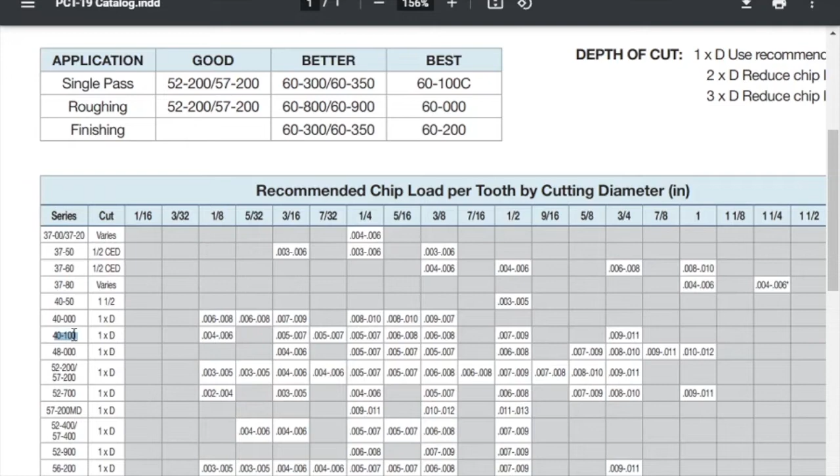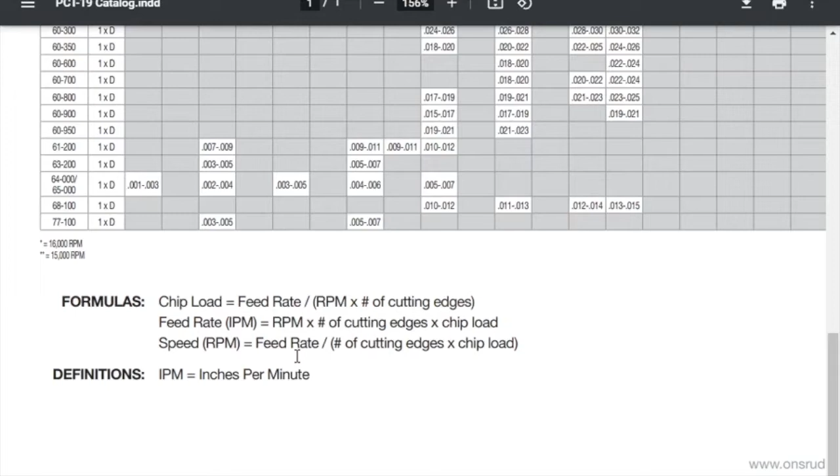And we have the 40-100 series bit, and it's going to tell us this is the recommended chip load that we should be using. Something to note here, they do give you the chip load feed rate calculations here at the bottom, but we're going to use Fusion 360 to help us calculate that out. So based on these chip loads, we're going to basically determine what our machine is going to be using, and since the chip load is given, Fusion 360 will tell us what our feed rates are at the end.

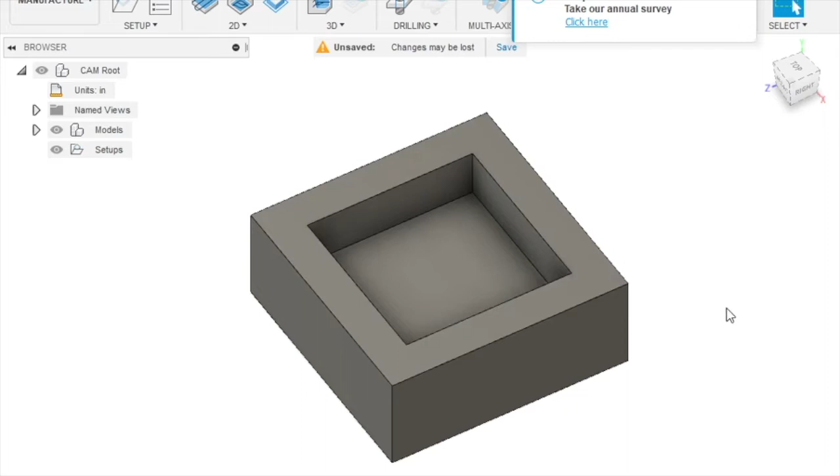So let's go back into Fusion 360 here, and this is the part that I want to do. So if you remember from the previous one, we have to first set up our material, and once we're in the setup, we'll go here into the stock material, and in this case I just want to mill out this pocket. So you can see how it's kind of overlapped the box. We're going to change that real quick. We're going to say from solid, we're going to click on our solid,

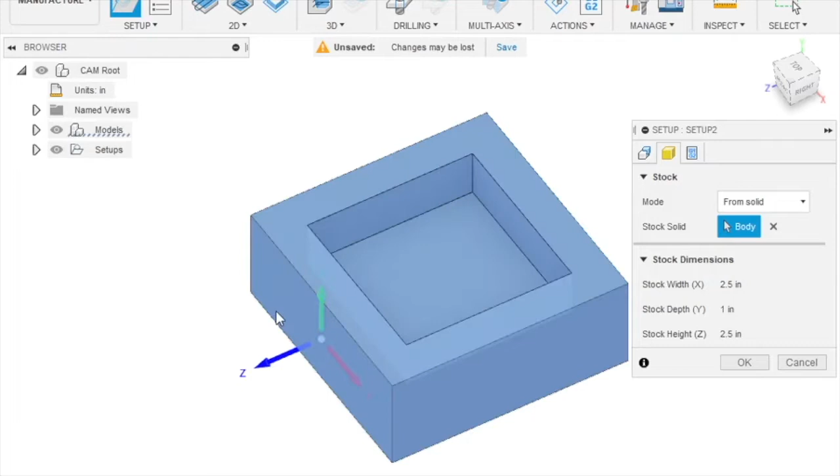and now our cutting box is the actual solid itself. We're going to go back to setup, and we're going to pick a machine point. Normally what I like to do is pick the top corner because that's where I'm going to zero my machine out. And then as for orientation, just make note if you do need to change that. So as of right now, my Y and X and Z are in the wrong coordinate system. So we're going to go back here and we're going to try to flip the orientation.

So we're going to pick the X and Y axis because that makes life easy. So this is my X axis, this is my Y, and my Z is now in the opposite direction. I'll just click on Z, and it was supposed to just flip it as easy as that was, but that did not work. So there we go.

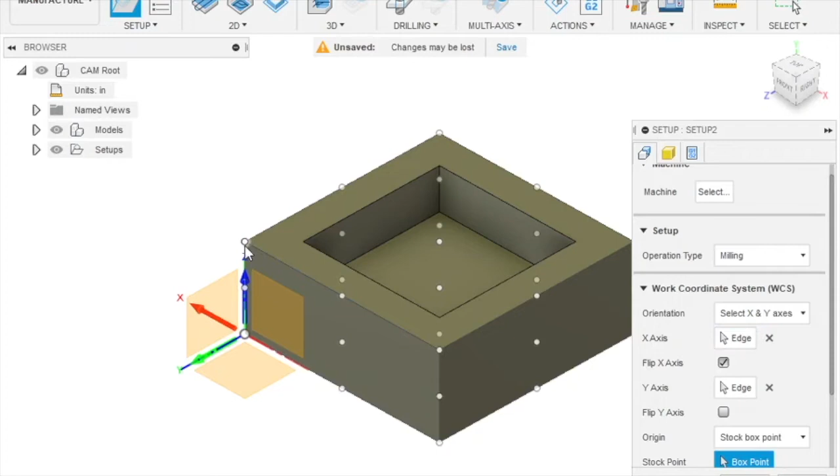X, Y, and Z. I'm going to end up picking my stock point as the top again. And there, I just want the Z going in the up direction. My X and Y, obviously you can flip and rotate and play with that as need be. I'm going to go ahead and hit OK.

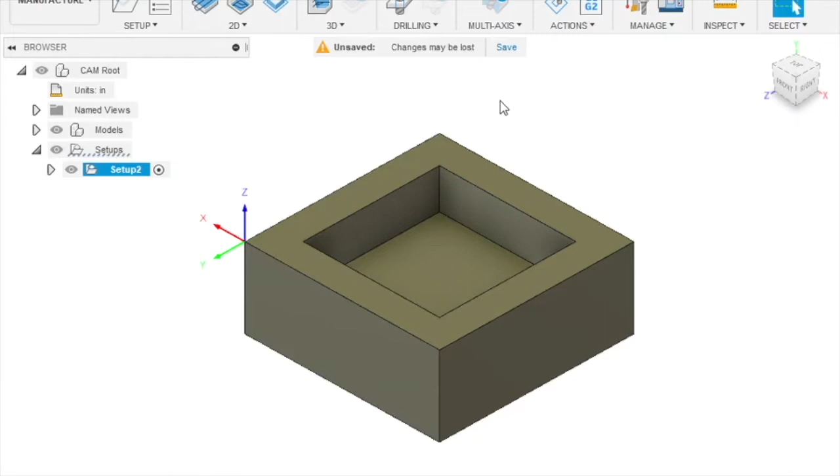And there we go. So now you're saying, okay, well, how do I input my tool that I want to use? So in this case, we're using that Onsrud 1/8 inch bit. And that's where we have to then go into our tool library. So what we're going to do is go into Manage, Tool Library, open that up.

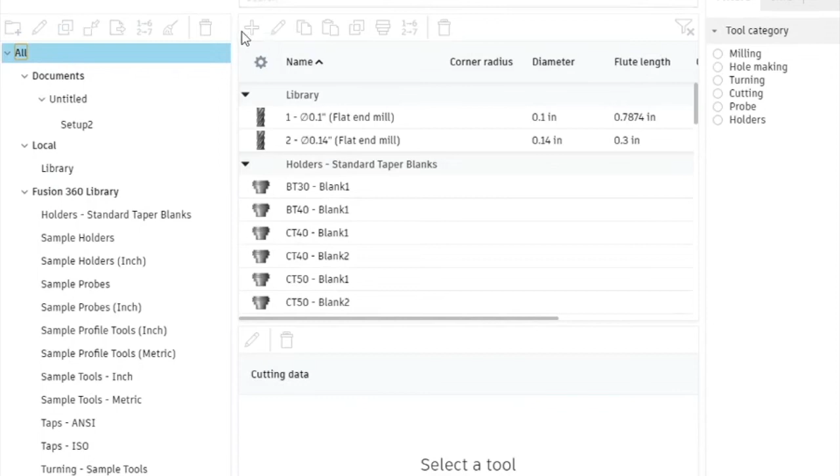Inside of here, you'll see a little plus sign at the top. We're going to have to click into one of these. So I'm just going to go ahead and click Library, for example. And you'll see the blue plus sign has been added. If you're in the All category, you'll see it's grayed out. That just means you need to drop into one of the subcategories in order to add it. So we're going to go all the way into our library and click the plus sign.

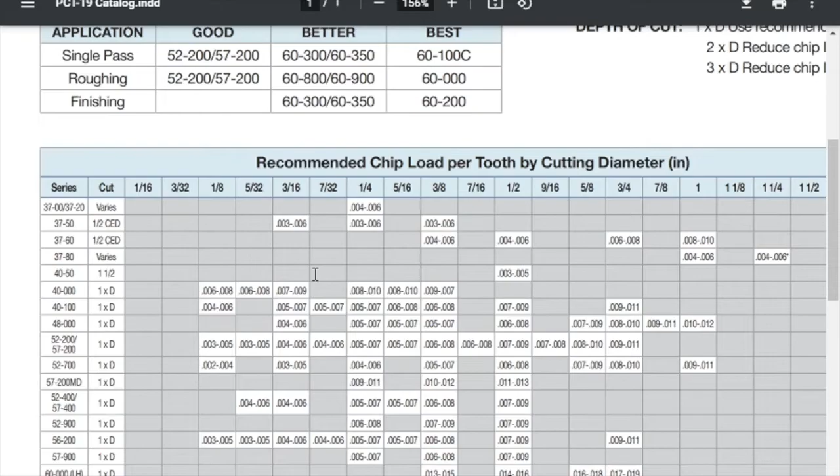So this bit for this purpose is a flat end mill, 1/8 inch diameter. Length of cutter is 3/8 of an inch. The shank diameter, which is past the cutter, is 1/4 inch. Our overall length is 2 5/8 inches.

And a lot of times people don't realize it, but you want the helix direction normally when you're milling items to come up, because what that does is it pulls the chips away from your material. There are some instances where you want to use the helix direction going down, but for a home hobbyist, just make sure that you pick the up direction.

In this case, it'll have 2 flutes. If you can afford to get a higher number of flutes, it is recommended, because then with your chip load, you can spin the RPM faster. So obviously less flutes, less RPMs, and you'll see that in the demonstration here, hopefully. So here we go. We have a flat end mill, and we'll go ahead and pick that.

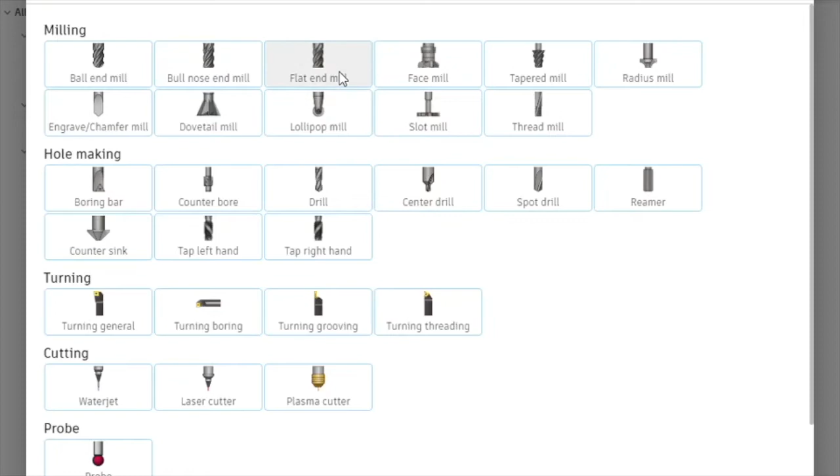And we'll just call this Onsrud 40101, which I believe was the tool name. So let's just double check. 40101. And for this case, we're actually going to call it hardwood.

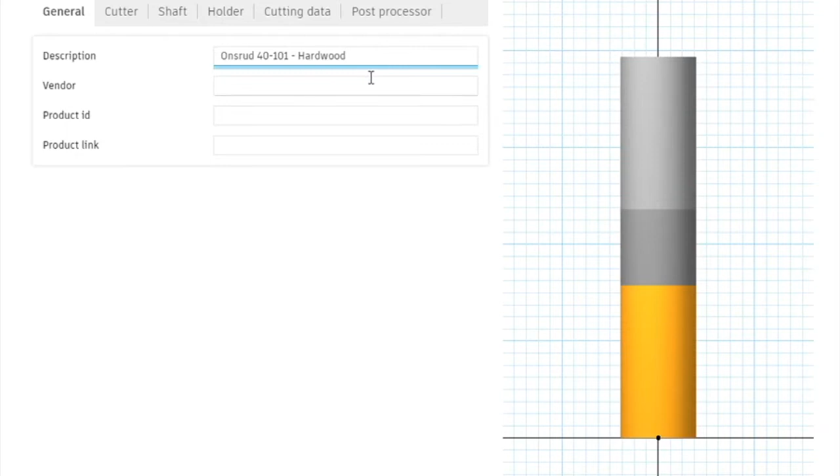The reason why we want to at least call it hardwood is because there's different chip loads for different types of materials with their data sheets. So a lot of vendors have these data sheets. It's just a matter of finding them. And especially a reputable manufacturer of end mills, they'll have that information for you.

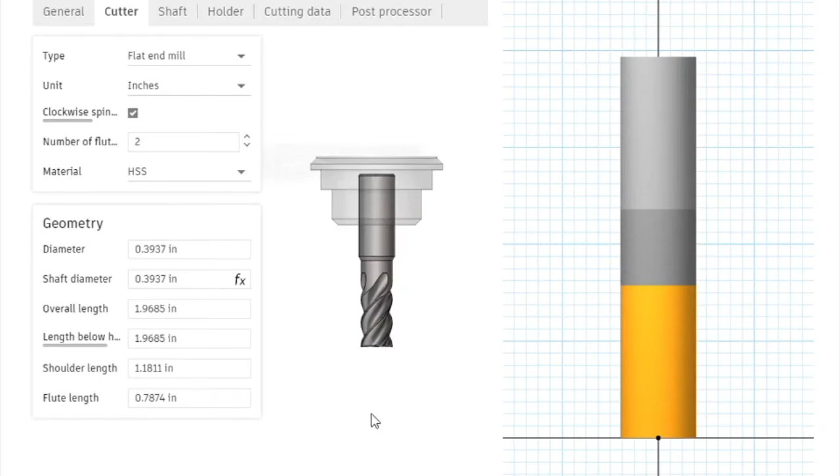So we'll go here to cutter, make sure the flat end mill, number of flutes we said was 2. This is going to be a high-speed steel, if I'm not mistaken. Yeah, high-speed steel HSS. And it's going to be 2 flutes upcut. So my diameter in this case is the cutting diameter. So we're going to say 1/8 of an inch.

Our shaft diameter. So when you're clicking here to the left, you'll see the blue arrows here on the right. So diameter is asking about the cutter. The shaft diameter in this case is different. It's 1/4 shank diameter. So we'll show you that's going to be 1/4. And over here is what it's kind of drawing out the tool.

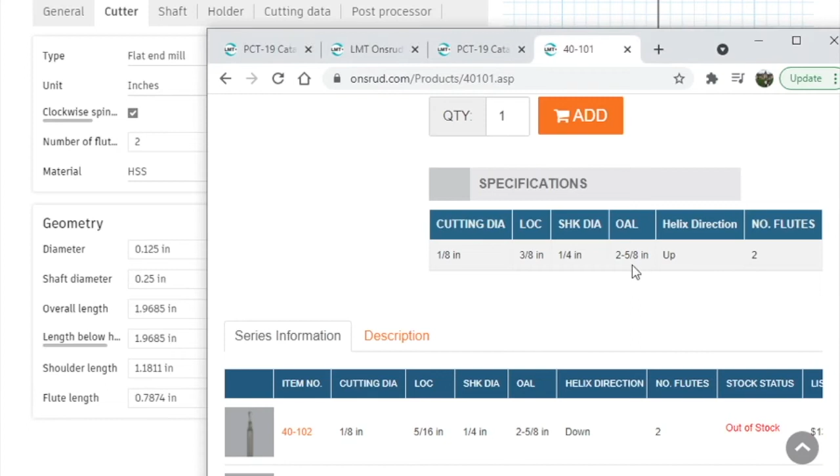Our overall length was the 2 5/8. So we'll go to overall length, say 2 5/8. And then length below the holder, we'll just assume we probably have that chucked up pretty good in there. So let's just say 0.75. Whoops.

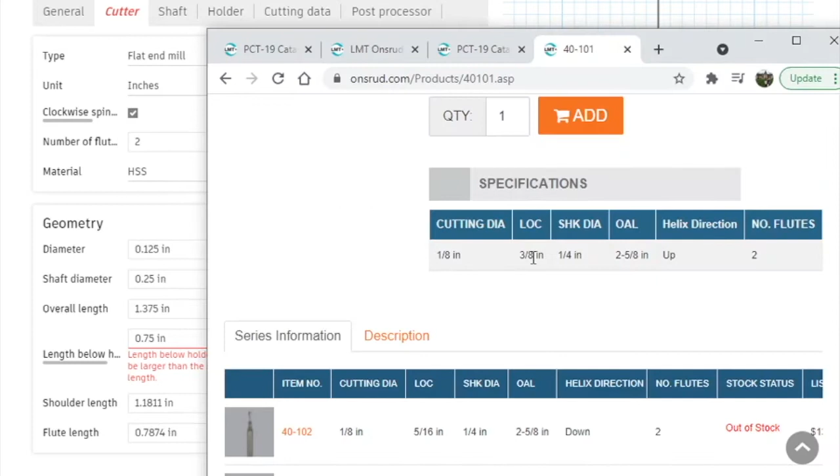Okay. Our shoulder length, which is basically we'll call that the cutting length. And we'll go here. And the length of cut, I believe that's what LOC is, 3/8 of an inch. So click here and say 3/8 of an inch. And then the flute length, again, we're just going to say 0.375 or 3/8 of an inch. So there we go.

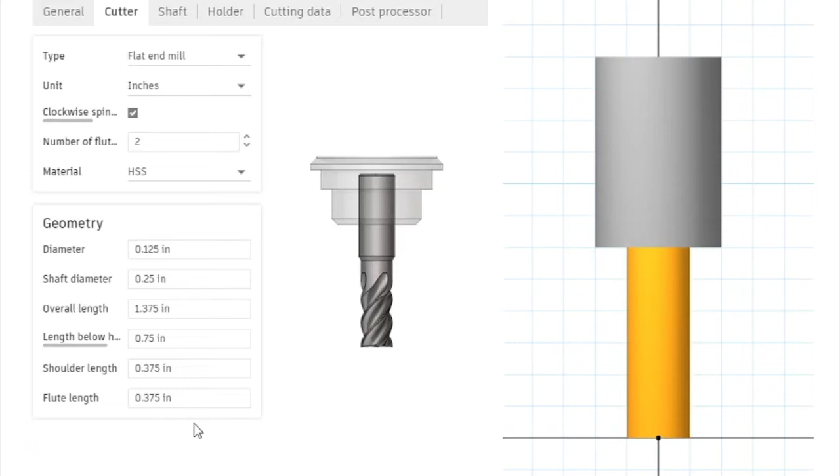This is basically all you need to do to set the tool up, get the geometry straightened out. And once we're there, then we can go into, if you needed to add a shaft, any type of special holder, but we're going to assume you have a desktop machine and not something that's automatically tool changing, and you don't have a really fancy machine that needs to know exactly what collet is holding it.

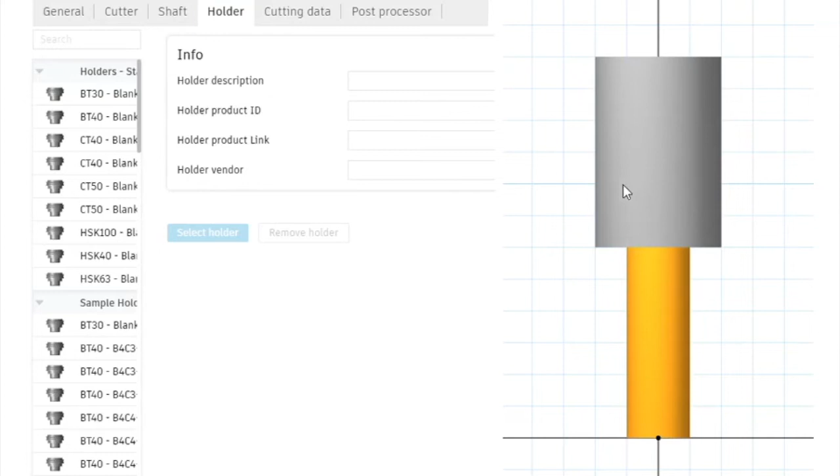And that's when you get into more fixtures. If you have to let your tool work around a fixture, you want to basically try to input as much data as you can so you can see if there's going to be any collisions with any type of work holding. But if you're a hobbyist like myself, we can skip that.

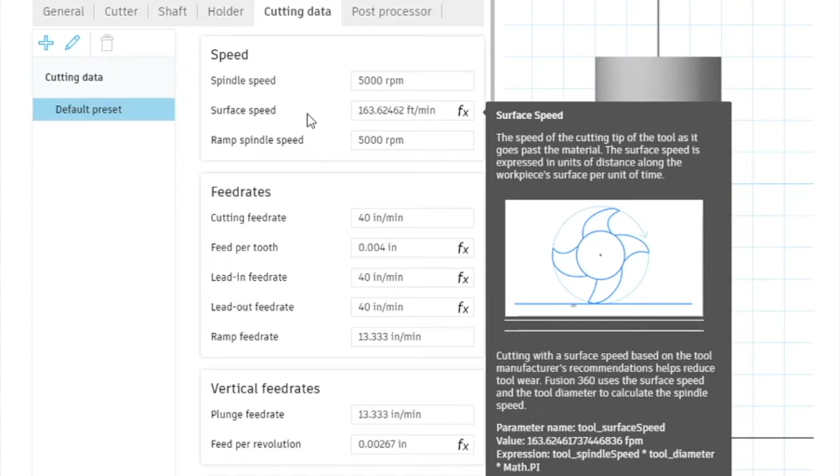We'll go into here, and this is the cutting data. And this is where you really want to try to focus on what your machine limitations are. For my case, my machine itself, the speed, I believe, is 150 inches per minute, which is the max the machine will go. Feed rate is what we were talking about. So my machine will max do 150 inches per minute.

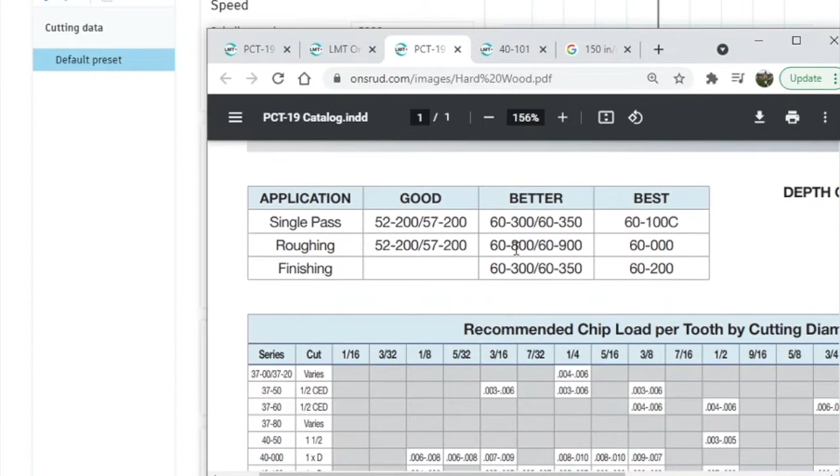And if we go back into the Onsrud tools, into the data sheet itself, where it says what type of chip load we are looking for. So we're in the 40-100 series. We're using an 1/8 inch bit, so we want our chip load to be 0.004 to 0.006. So that is if you had a purely rigid machine.

If you don't have a purely rigid machine, meaning if you have one of those desktop CNCs, play around with these numbers. It's probably going to be half of what these chip loads are, because your machine's going to have some type of deflection. Understand this though, the smaller that you go with the chip load, that means the more your material is using the cutter, which means your cutter can dull about twice as fast. So just keep that in mind.

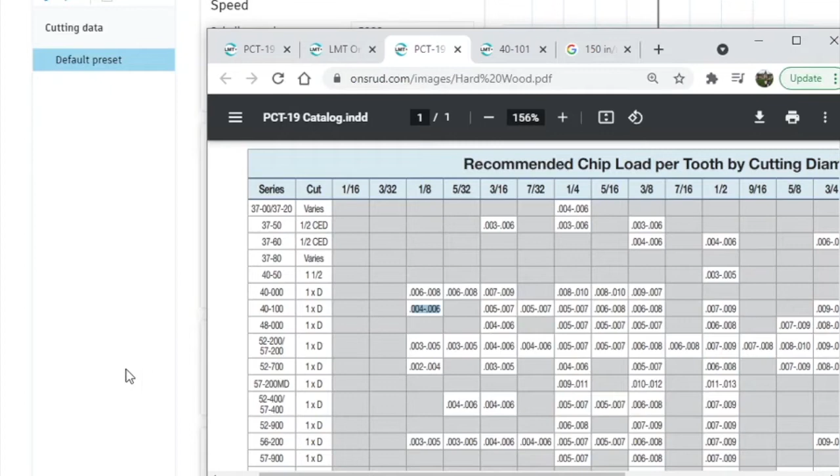These are optimal based on a pure, sturdy machine. So if you do have, like in my case, a G0704, most of these chip loads will work, especially if it was a hardwood, for example. So let's go ahead and use on the lower end 0.004. So feed per tooth, we're going to say is 0.004.

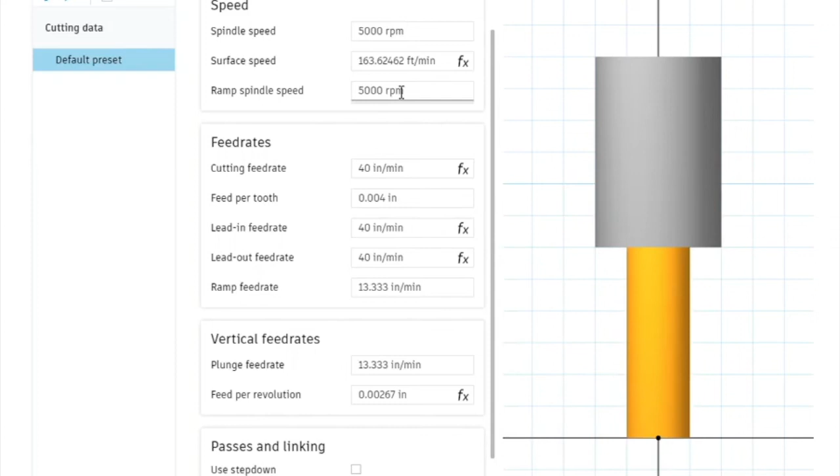Hit enter. And now what this is going to do is basically make us kind of play the game. If I wanted a 0.004 based on an RPM of 5,000, the max inches per minute that I can get out of the machine is 40.

I can try to play around with this, and this is where the game kind of plays, but we'll change the spindle speed. On my machine, I have a belt drive conversion, so 4,000 is actually my max. And you can see here, based on the chip load, the max speed that I can run this bit is 32 inches per minute. And that's doing all the calculations that basically are in line.

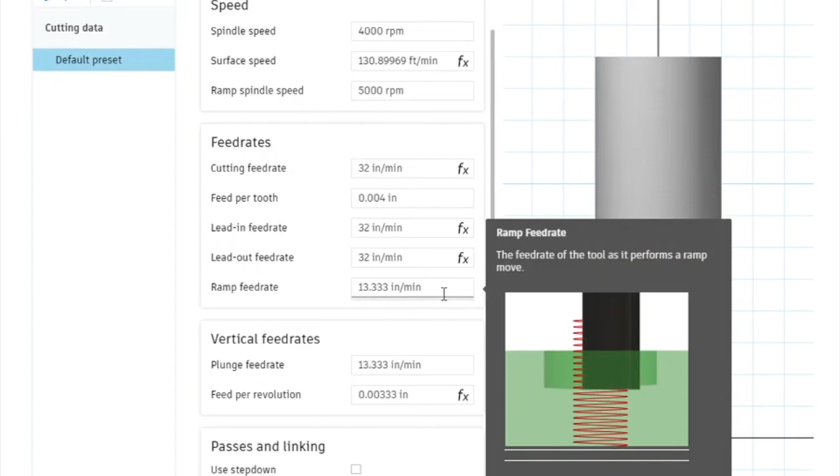Now these ramp feed rates are just going to be conservative feed rates that they have calculated through Fusion 360. So obviously if you're plunging into a material for the first time and you've never done this before, go a little bit slower. Again, it's all about rigidity on your machine.

When you start getting into the smaller bits, like in this case 1/8 of an inch, if that small of a bit sees any type of deflection, it will snap, and you'll be wasting, in this case, I think it's a $13 end mill. So something to keep in mind. You just want to take it slow and don't rush your cuts. This is where optimization of your tool paths comes into play, trying to make sure you're not cutting over things that have been cut before.

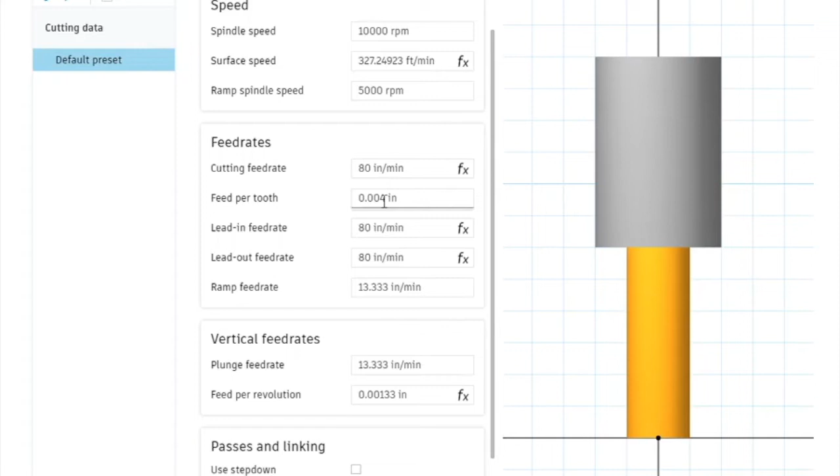But let's say I had a really fancy machine, and let's say I can get 10,000 RPM, for example. Now you can see how 10,000 RPM has basically jumped the feed rates automatically to about 80 inches per minute, with a feed per tooth of 0.004.

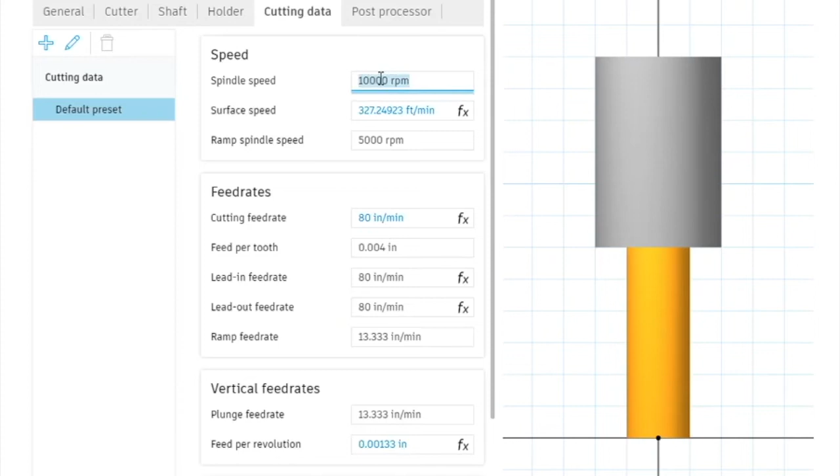This is based on that, but we will say disabled for coolant if you had a coolant, and that's about it. That's how I end up programming my Onsrud bit. So let's just put this back down to 4,000 RPM, which is the max my machine will go, and it'll run at about 32 inches per minute. And we'll leave all the plunge rates and everything because we can mess around with the step down.

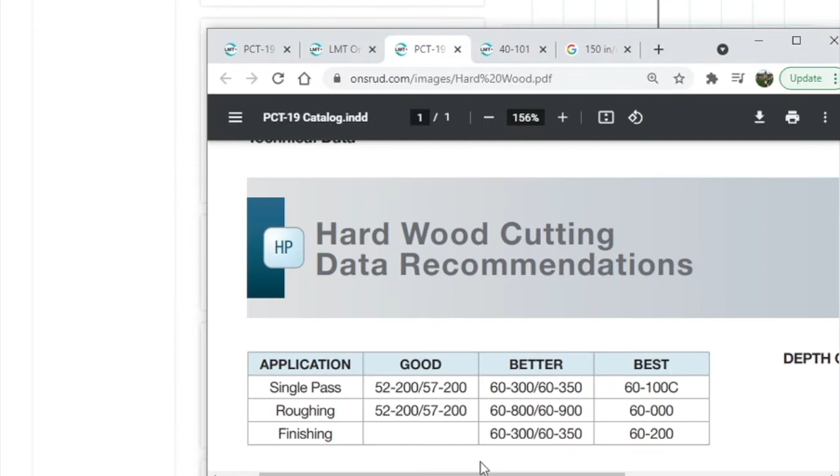We could actually link the step down here, and this probably is more beneficial if you do it now than later, but I always do it later. For this purpose we can try to do it now. Your step down per Onsrud is actually saying depth of cut 1 times D, use recommended chip loads. If you want to go 2 times the depth, reduce your chip load by 25%. And if you want to go 3 times your depth, reduce your chip load by 50%.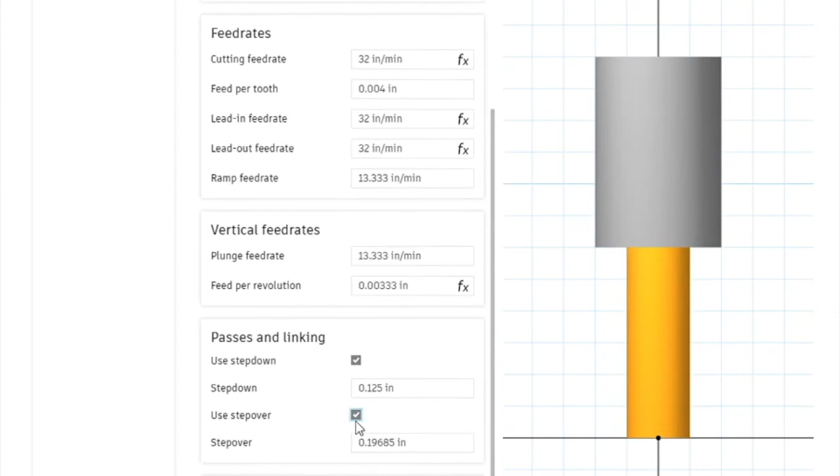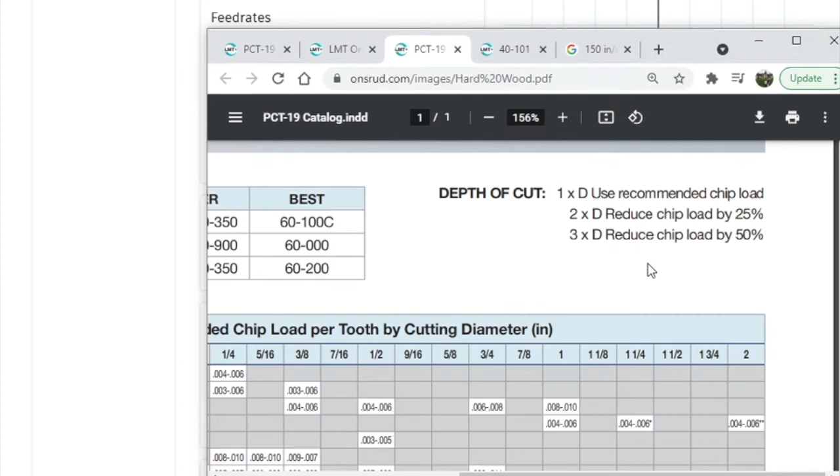So we're not going to overload this. We'll use 1 times the diameter, so we'll say our step down is 1/8 of an inch, and that will be our max step down. Our step over is how much the part steps over onto the face of the end mill. Step over is normally a fraction; I've seen anywhere from 1/4 of the diameter to 1/2 of a diameter, but let's see if Onsrud has anything for step over rates. I don't really see anything for step over.

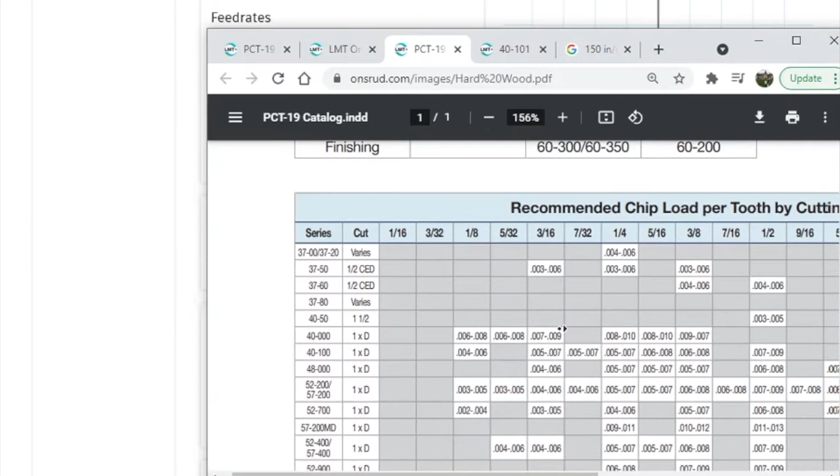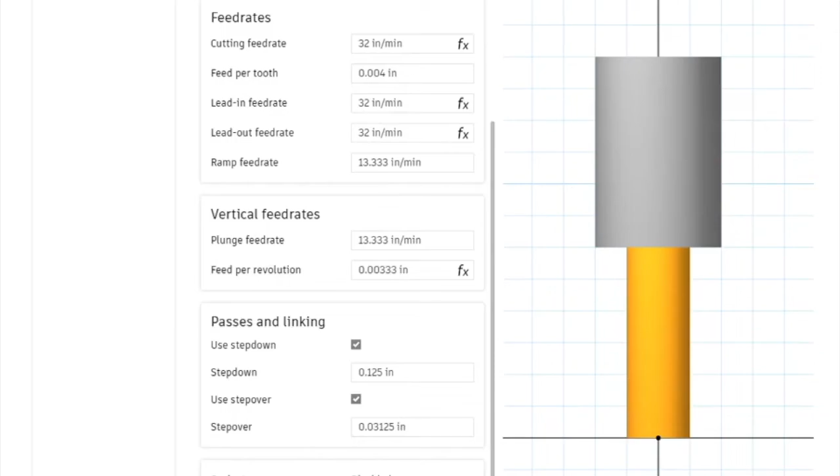So we're just going to take a conservative rate for right now, and we're going to say it's going to be 0.25 times 1/8 of an inch. So our max step over that we're going to use is 0.03125, and that's just going to be a 25% max step over. Go ahead and click OK and accept. And now you can see our tool has been added to the library. Close and go back to our model.

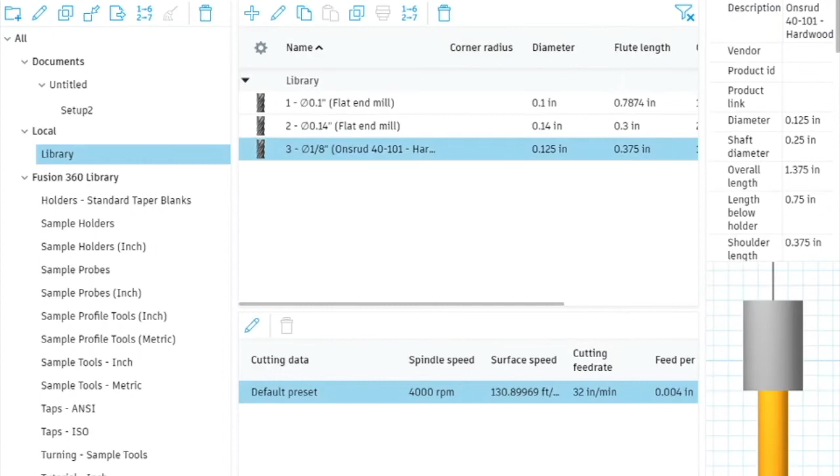Here, we're going to set up a pocket, and in this case, we're going to do 2D adaptive clearing. We're going to click the surface that we want to pocket, which is that. We're going to then pick our tool, which was the Onsrud tool we just created in our library. So we'll click there, hit select. Double check our geometry, our heights, a retract height.

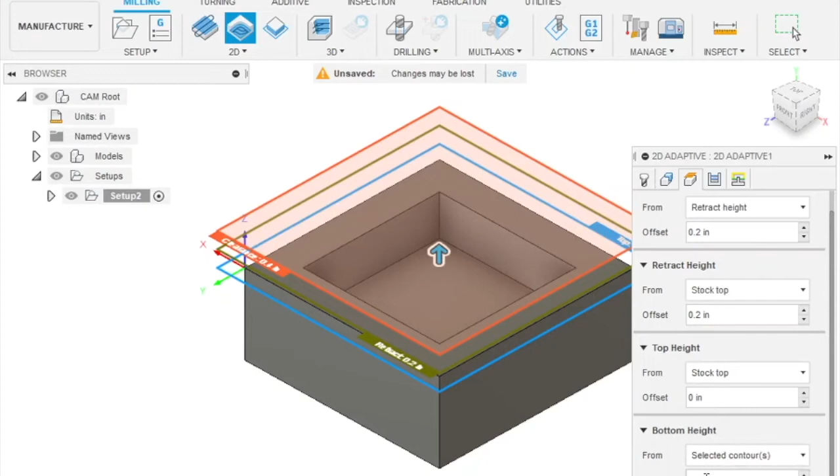Now we've had these talks before on my machine. Basically the retract height doesn't need to be as high, and we can verify our offsets. So 0.2 of an inch on the retract height. Top height is going to be 0, and offset off the bottom is going to be 0. Look at our passes again. Optimal load, that's our step over, and our minimum cutting radius is, I guess, 1/10, where the toolpath will have a bend.

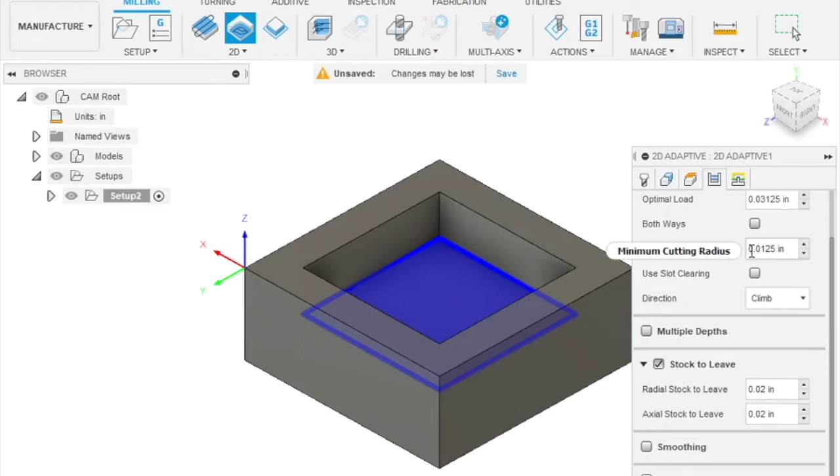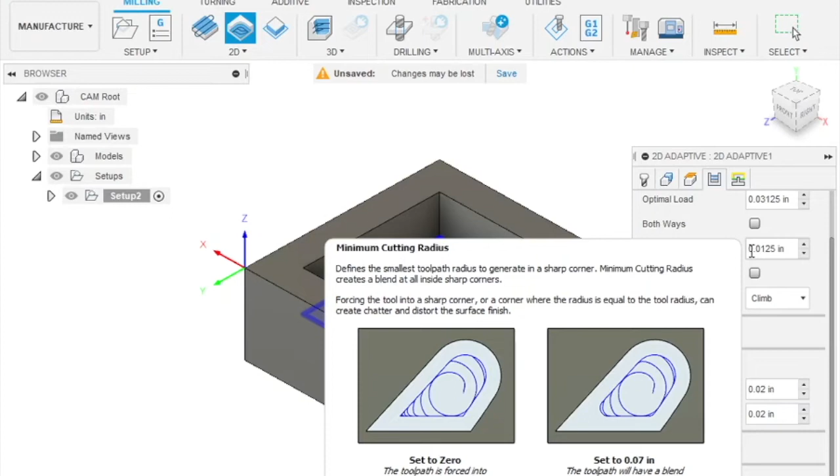I guess we could set this to 0, but this is basically saying for the hard corners, we're not going to get our hard corners. If you set it to 0, it's going to put the tool as close to that as possible. If you set it to 0.07, then it's going to kind of round the inside. So that will affect your fit and finish if you were trying to mill out a square hole. But in this case, we're just going to leave it at whatever it defaulted as.

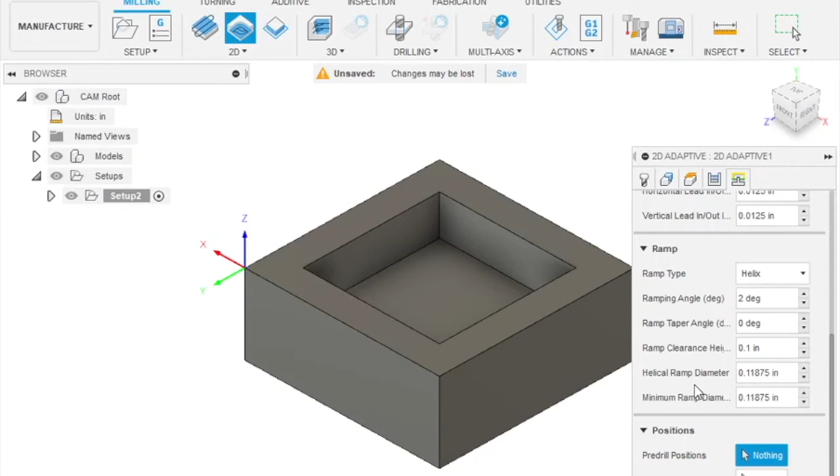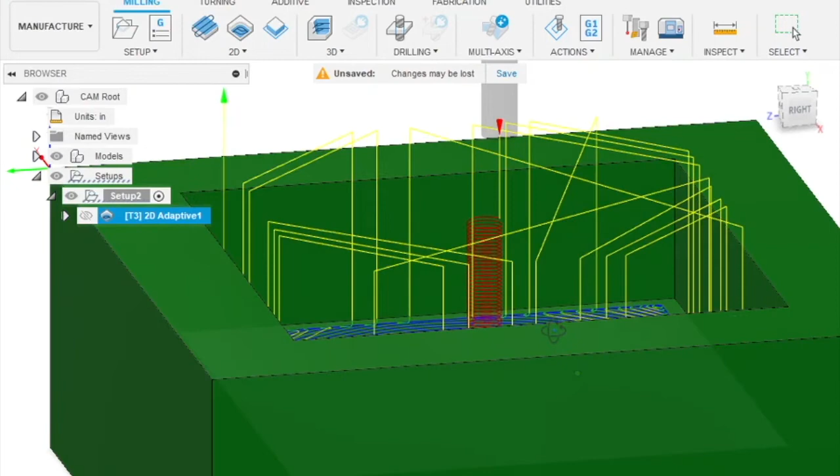We're not going to try to leave any stock this time. We're just going to let it do a full pass. And then we're going to look at linking and verify everything looks good. Looks like we're going to do a helix type ramp in, and we're going to see how this works. So our total piece is 0.25, and 2D adaptive will go the full depth of the cutter. Same as 3D adaptive, they like to use the entire cutting surface. This is a 1/2 inch cut, so we'll just verify in this setup here.

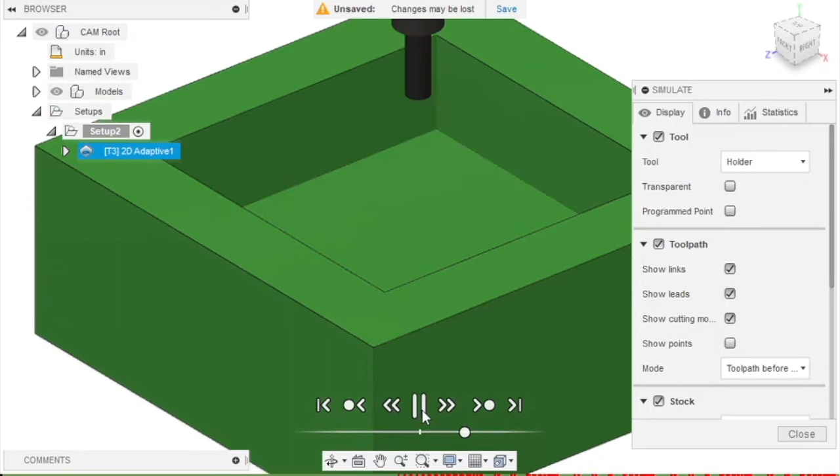Let's click simulate and double check what's going on here. You can see a lot of red marks here, and it basically says the shaft collides with the stock. Because of the depth of cut on this piece, it's actually too deep. You can see here where the side of the bit is actually going to hit the side of the box, and that's where all these red line warnings are coming from.

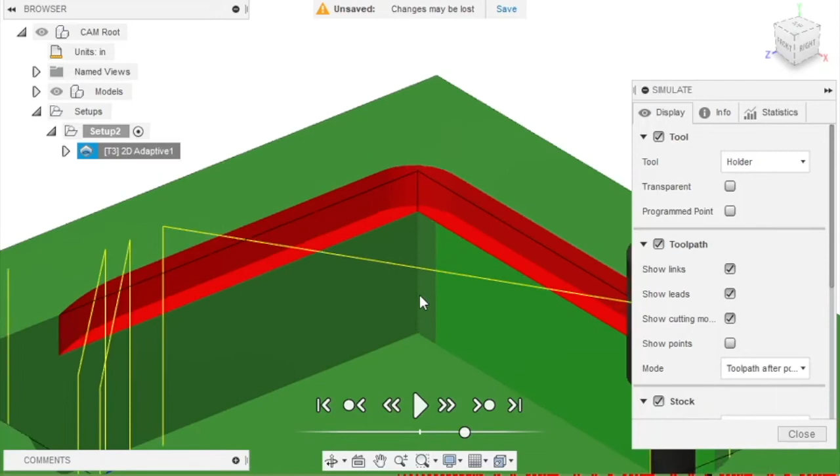So we're going to go ahead and pause this and take a look a little bit deeper like we were just saying. But you can see here how the shaft is now interfering with it. So these are warnings that you want to look for when you're doing not just only speeds and feeds, but when you're doing any type of operation. You want to make sure that you can actually achieve the depth that you're looking for.

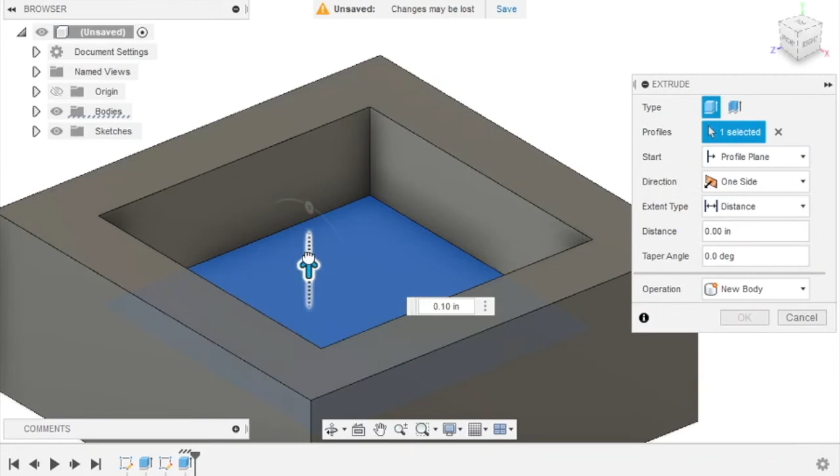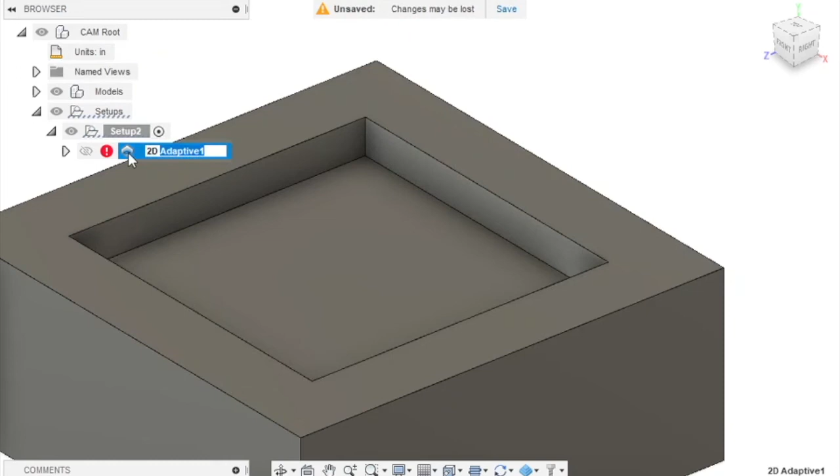So in this case, I know my platform could only be 3/8 of an inch, so I'm going to raise this up 0.1, click OK. And now when we go back into manufacturing, we'll right click, we'll hit generate on the adaptive toolpath one more time. And it's having a problem, so let's just go in there. Go to edit, say yes. Geometry, we're gonna reselect our geometry as the bottom here. And then everything else should have been saved.

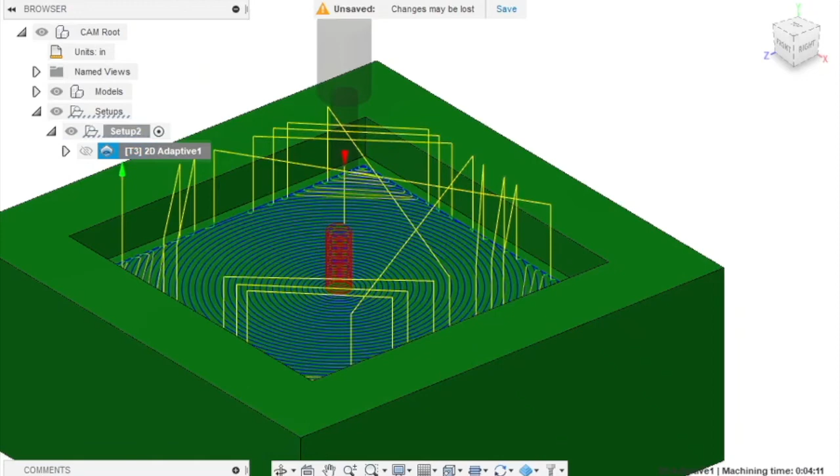And now when we go in here, we'll say simulate. I want to see if we can make it so we don't see, there it is. We'll leave the model instead of getting everyone dizzy here. There we go. So you can see the tool's going to go down, and that's probably the most aggressive cut, is that helix getting down in there. I don't like it for metals per se, because it is a very aggressive type of entrance.

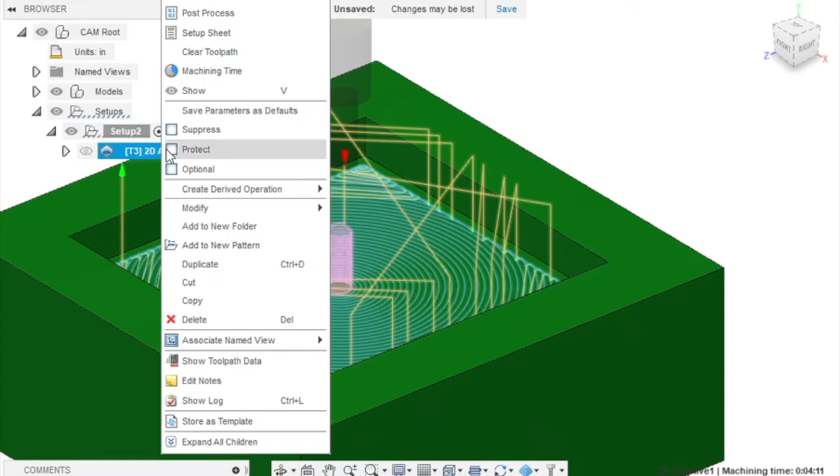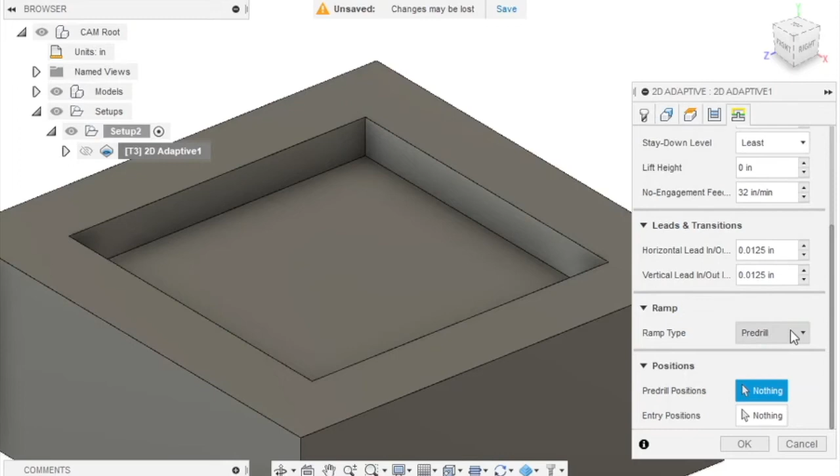So let's go ahead back in here, linking, and let's change it from helix. Let's say, there's only a couple options, I guess. Plunge pre-drill, and that's if you pre-drill the hole, which is definitely a possibility. I guess we'll leave helix, and let's reduce the angle, and let's increase the diameter slightly.

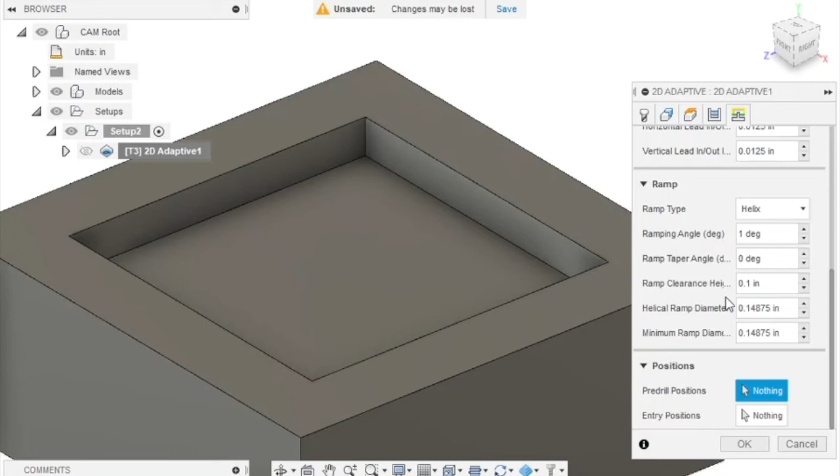Our tool is 0.125, so it's going to be taking a pretty deep cut, so that's why it's very important that you basically not rush this process, especially if you're going into something and you have a very non-rigid machine. This is normally where the tool will break. So we'll just say okay. And if you can pre-drill a hole, I think it is beneficial to pre-drill a hole if you have the opportunity, if you have a non-rigid machine, for example.

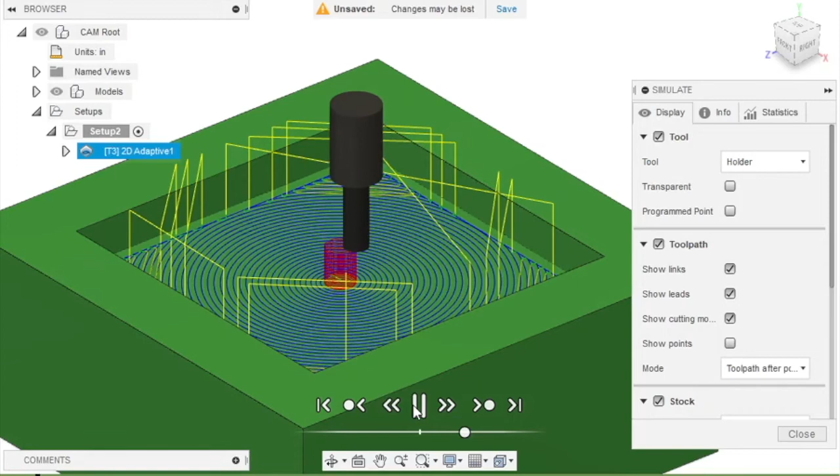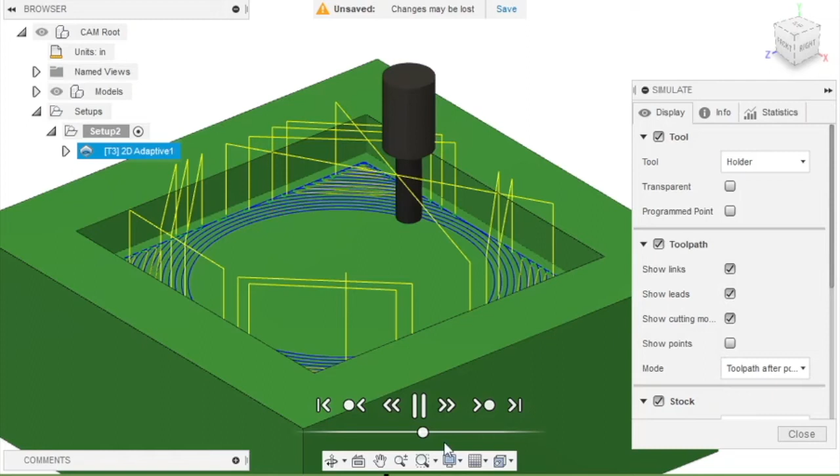Let's generate this one more. Let's simulate this one more time. Go ahead and click play. And that does look like it's a lot better. And everything seems to be working. Now, mind you, this is a lot faster than it's really going to be. In our case, you can see how slow that speed is in normal speed. So we'll speed that up and be done.

This is one thing about the corners. Take a look here. You can see how it's two different shades of green. That means that the tool itself is not going to reach into this corner by that much. So make sure that you're okay with that, because it is basically the diameter of your tool.

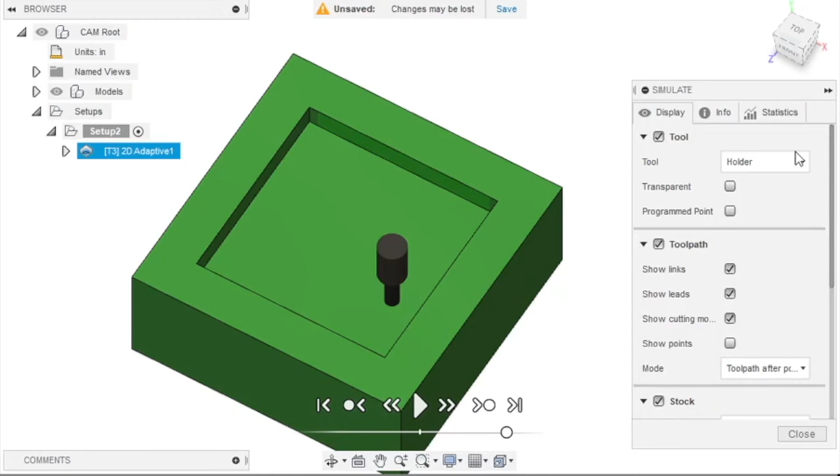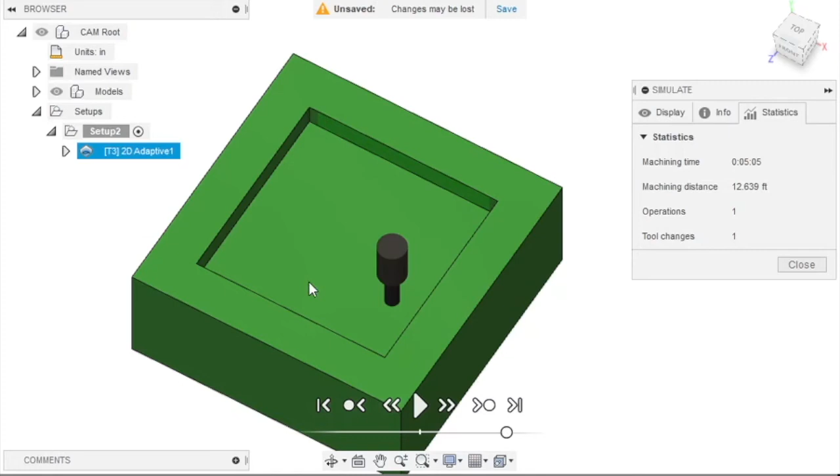And let's go to statistics. So in this case, to machine this out at that speed and feed with an 1/8 inch tool, it's going to take 5 minutes and 5 seconds to do the full operation of machining. And it's going to be about 12 linear feet of machining distance. That's why it's very important to understand the size of the tool for the job that you're doing. If you can get away with this job being a larger tool, then obviously your machine time is going to be significantly lower.

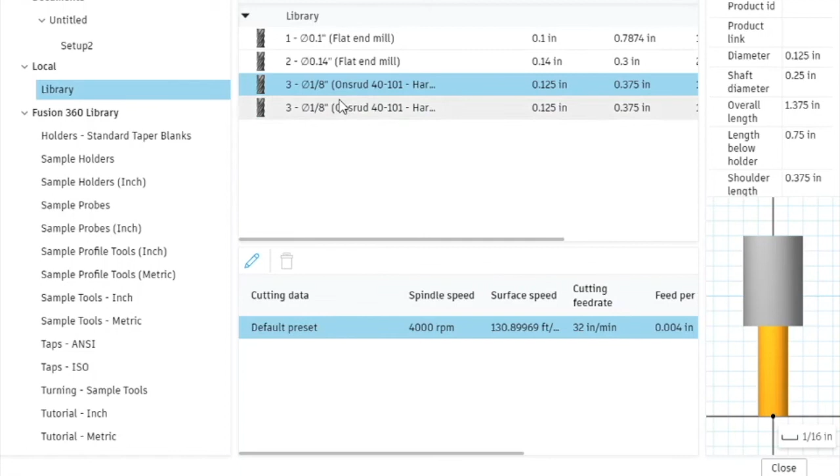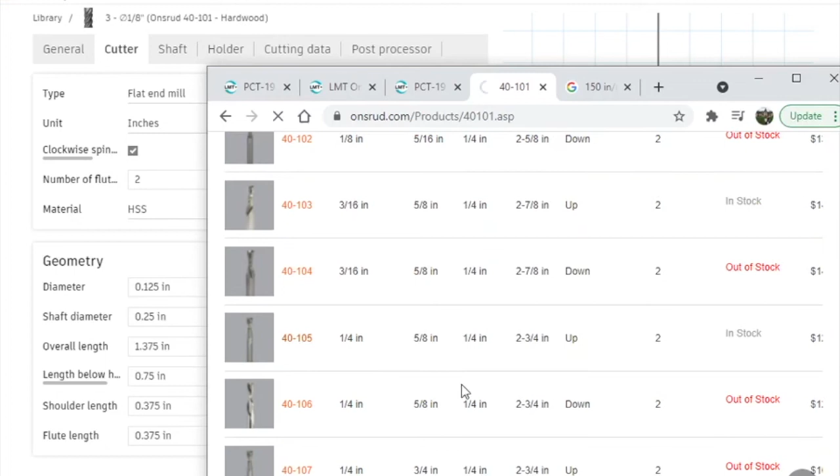Let's show that for example, but let's show the downside of it. So let's go back into the tool library. We're going to go back into here, and I'm just going to copy this tool and paste that. And what we're going to do is edit this tool, and we're going to call this one the Onsrud, and we're going to change it from the 1/8 inch one. Let's change it to the 1/4 inch Onsrud tool. So 40-101, they make a 1/4 inch, 40-105 for example. So let's go into 40-105.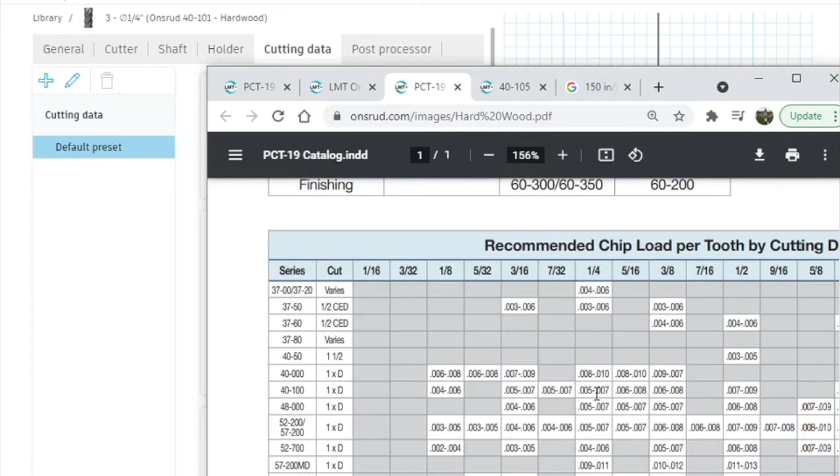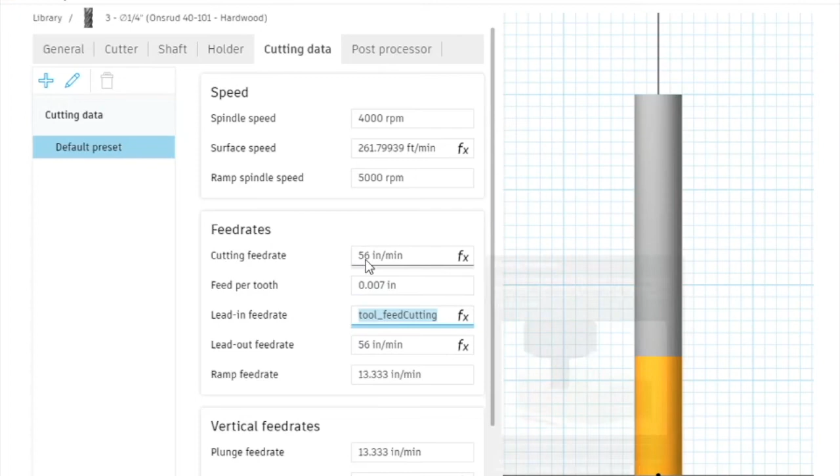It is a 2 flute, 5/8 of an inch, 1/4 inch diameter, 1/4 inch cutting diameter, overall length 2 3/4. So let's go ahead and change this real quick. The cutting chip load, go double check what the Onsrud says for their cutting chip load. Still the same series, except now it's going to be a 1/4 inch, so we can go up to 0.005 to 0.007. So let's go ahead and change that to 0.007 because it is a larger bit. Click off of it. Now you can see the speed has almost doubled to 56 inches per minute at 4,000 RPM.

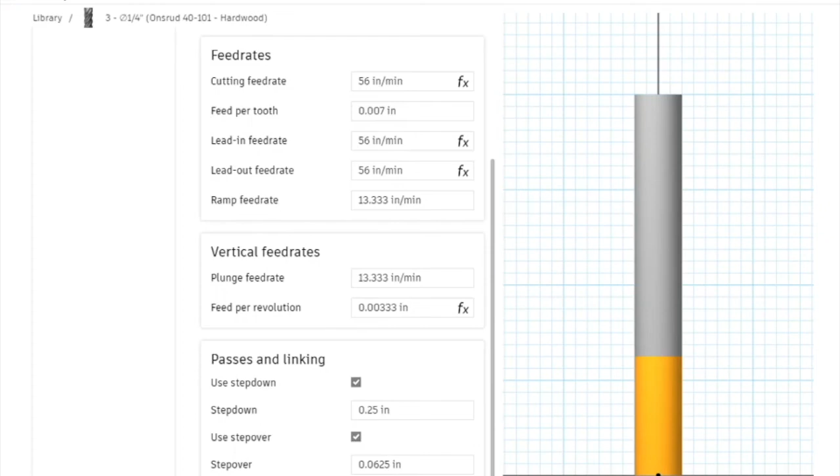We'll change this to 0.25, enter, and we'll just leave that at, let's say 0.25 times 0.25. So our step over now is a quarter of the diameter. And with hardwood, hit accept. We're good to go. Close. So let's go back into our adaptive path.

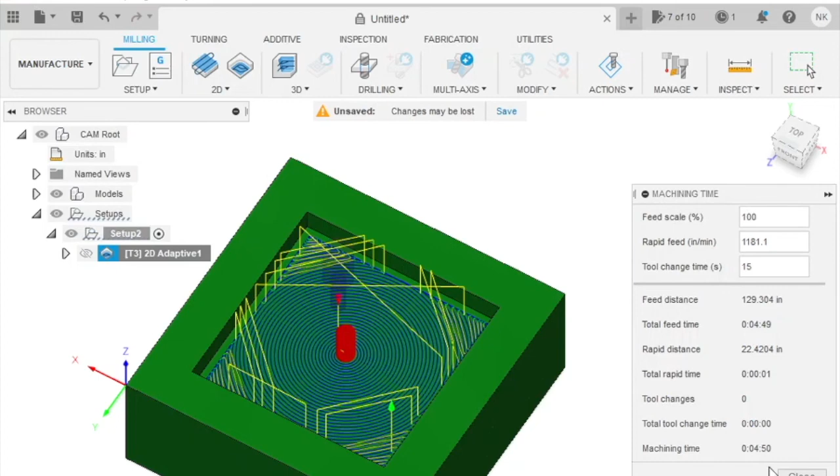You remember that if we go to machine time, just to double check again, it was going to take total time of about 4 minutes 50 seconds machining time. I think the other sheet said about 5 minutes. So just something to keep in mind here. So just remember about 5 minutes. So let's go back to edit.

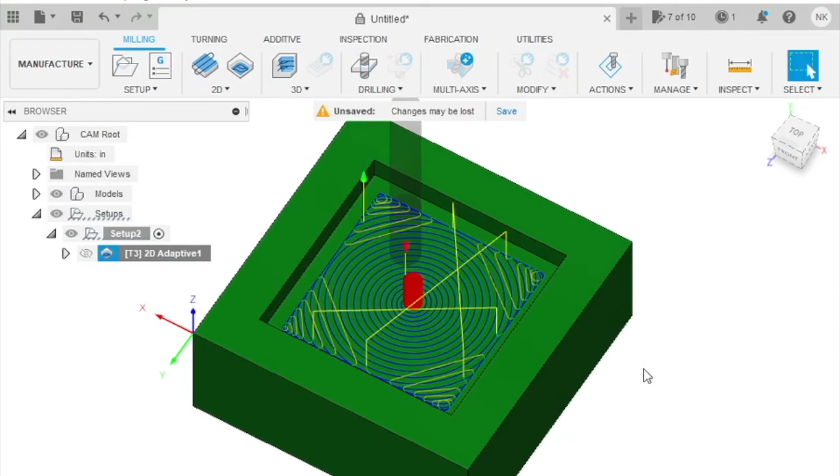Let's select the new tool. Let's go into our library where we just saved it. Let's use the 1/4 inch tool, select, and then hit OK. And now you can see the tool has changed significantly. The diameter has changed now. So let's go ahead and simulate it real quick here. That was way too fast, so let's go ahead and simulate it again.

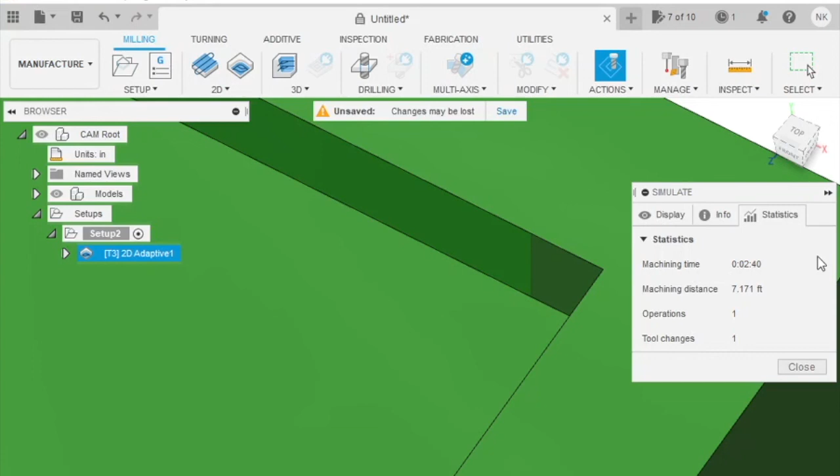So again, you can see the shaded area of what's not getting machined based on the tool diameter. So a little bit of the corner is going to be closed off, but let's go over here to statistics and look at the time. Just by upping the tool size, it's now almost 2:40, so it's roughly about half of those 5 minutes. So there you go. Hopefully that helps you understand a little bit more with tools, speeds, and feeds.

When you need to get the tool to move faster, then your machine needs to have a higher RPM. But a lot of the times the higher RPMs sometimes lose torque. So sometimes it's a give or take. If you need to machine something out with a very tiny bit, then you definitely need something in the 10,000 to 15,000 RPM range in order to make it viable so your machine won't be running a long time. But you can do any type of roughing operation with a larger bit, and then come back and do the fine tuning with the smaller bit if you need to get the corners, for example, in this case.

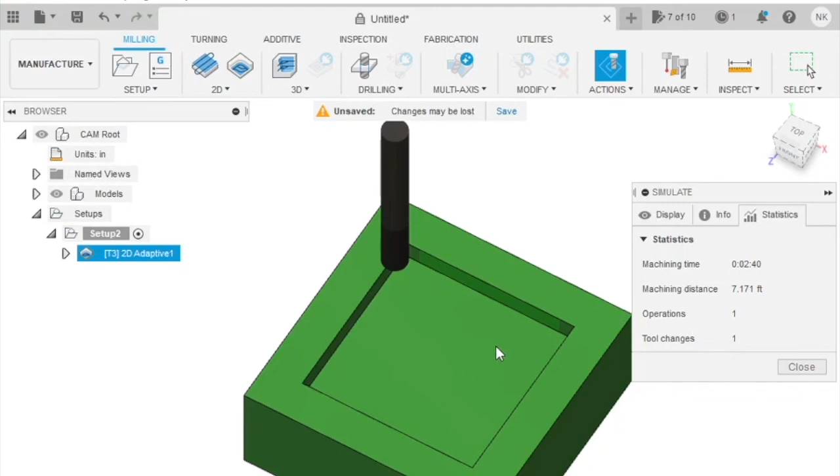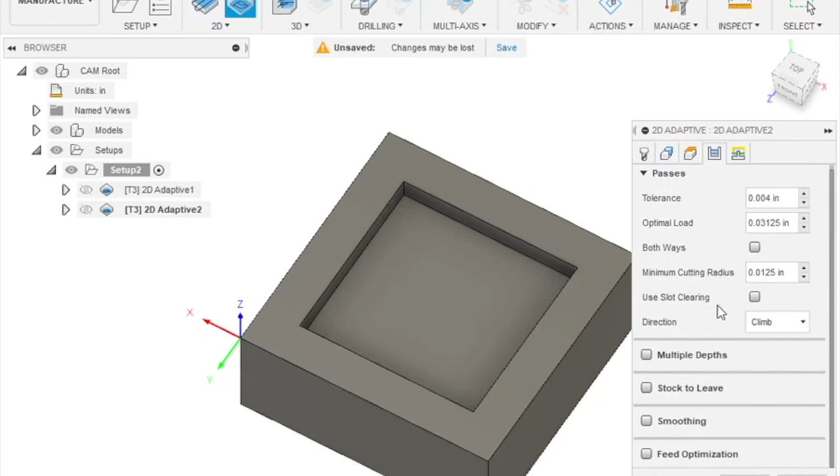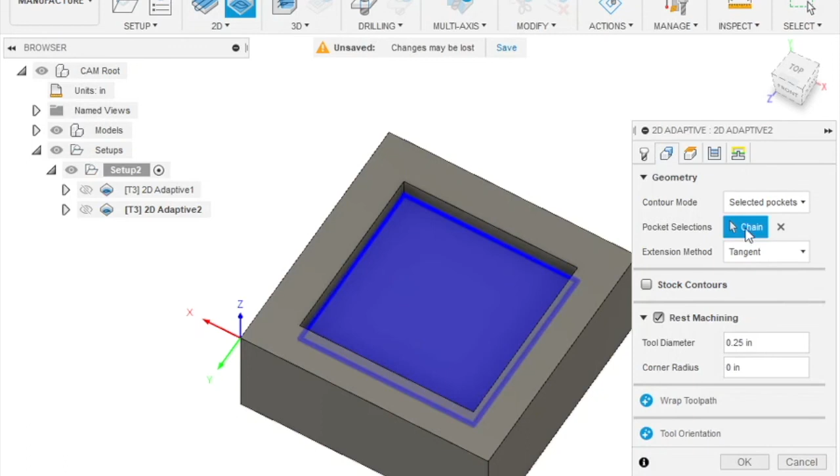Let's do another adaptive clearing. Let's change it to the smaller bit. So we're going to use the 1/8 inch bit, and we're going to go into our passes, and we don't want any stock to leave, just like the last one. And I don't know where they ended up putting it again, but we want rest machining, and this is going to start from where the other tool could not pick up. Let's make sure our pocket is selected here and click OK.

And there you go. So you can run this at 2 minutes and 40 seconds. Swap your tool over real quick and simulate this one. And what that does is just clean up the corners. Let's close out that, and let's look at the machine time. And you can see that took 3 seconds to go and do that operation.

So instead of waiting 5 minutes to do the whole thing with the smaller bit that you could wear out, eventually cause damage, or ruin a $13-14 bit, you could run a bigger bit, clear out most of the material, come back and catch the fine detail with the smaller bit, and with just a little bit of tool change, you're good. So hopefully you learned something today on this video.